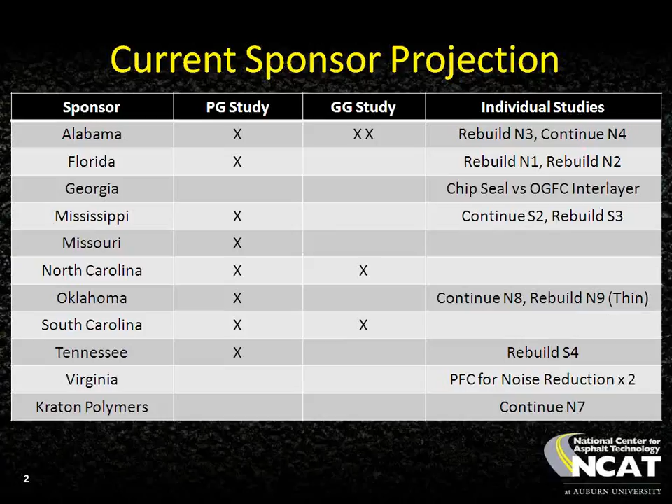And that letter of direction is important to us because we're going to start milling week after next, removing old test sections, removing sections that we placed in 2009. We're not going to engage in any activities related to the installation of new test sections, but we need to get the milling out of the way so that we can stay kind of in phase with our reconstruction contracts. We do have

both the plant production and the mixed placement contracts working through the process now at Auburn. The contract documents have been released to potential bidders, and we are waiting to fill in the gaps on some of the test sections at a mandatory pre-bid meeting that's going to be held here in a couple of weeks. So, again, that's kind of a reason for the timeliness of this discussion with you guys, is we want to make sure that things are headed in the direction that we expect them to head, and we got plenty of time. Now is the time to make course corrections, because we got plenty of time to do that.

So essentially, for our reconstruction timeline, we'll be milling week after next, and then probably the week of the 23rd, we would like to begin doing some work related to reconstruction. Lindy, if we could get a letter of direction by that time.

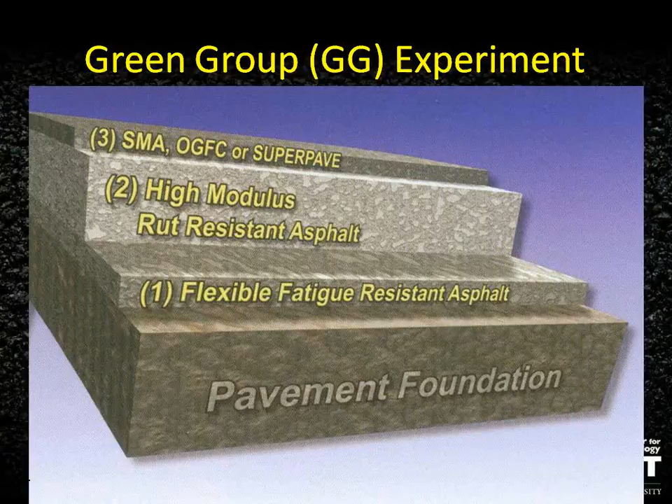So the basic recommendations we're making for this are, number one, we want to try to maintain that connection to the previous study so that we can make sense of it all through multiple research cycles. What that means is we would recommend that the subgrade and the base, and the basic principles of the mix designs from previous cycles, be our starting point for the mixes and variants we include in this group experiment.

The big difference here is the control mix we're going to use for this green group experiment, or that we would recommend, is kind of a quote modernized version of our previous control mixes, so that it's not 100% virgin materials. It's more the standard type of mix that you guys would be using on all your construction projects.

Can you be a little bit more specific about that, quote, modernization? Yes, ma'am, and I'll show you here in just a second.

Another thing we need to hammer out is our sources for the RAP, the RAS, and the tires that we're going to recycle. I had hoped that ADEM would be on the line so we could discuss the source of the tires with those guys. But what they essentially want us to do is kind of stand in the gap between industry and department, and make a recommendation that industry can embrace and the department can enable in their specifications, so we can end up with marketable improvements for them in the use of recycled tire rubber. Now, one of the things we don't know yet is who our contractor is going to be.

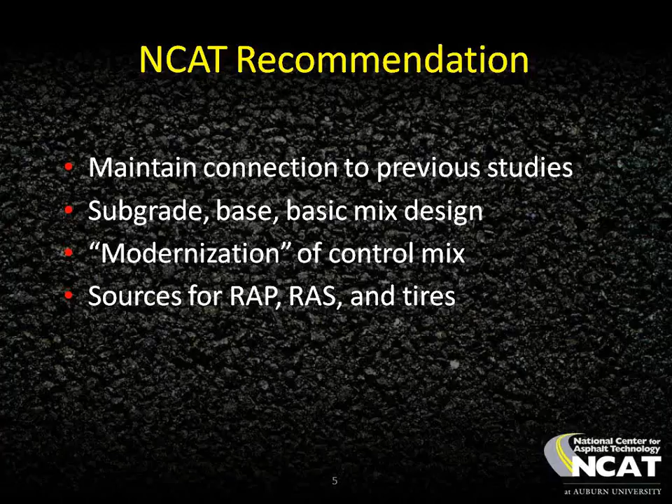We'll know more about who our contractor is in just a couple of weeks. I'm just trying to give you things to think about at this point in time.

Now, I think the general structure we're talking about doing, and this is obviously open for debate, this is the recommendation I'm making based on discussions I've had with Dave and Randy about this section. What we're talking about is a 1 1/4 inch surface on top of 2 3/4 inches of binder mix on top of 2 inches of base mix, giving us a total structure thickness of 6 inches. We've talked about maybe going thinner, but the high polymer mix is 5 3/4 inches, and it's done well because it has a super high fatigue resistance.

We've had 5-inch sections in the past that have failed after just a couple million ESALs, and 7 inches now has survived 10 million ESALs. So we think 6 inches would put us in a position in the middle that would either ensure we have failures within the traffic cycle, or if we're successful in extending life, maybe show significant differences between sections if we're really good at putting these things together.

Now, Randy, the reason I'm showing 2 inches in the base layer is that 2 inches was one of the standard thicknesses we used in 2003, but not in 2009. And the reason I'm showing 2 inches in the base, and beefed up the binder, is because we talked about using higher percentages of recycled materials in that middle layer. So the extra thickness we'd need beyond the surface mix, I threw it into the middle layer to drive the cost down as much as possible.

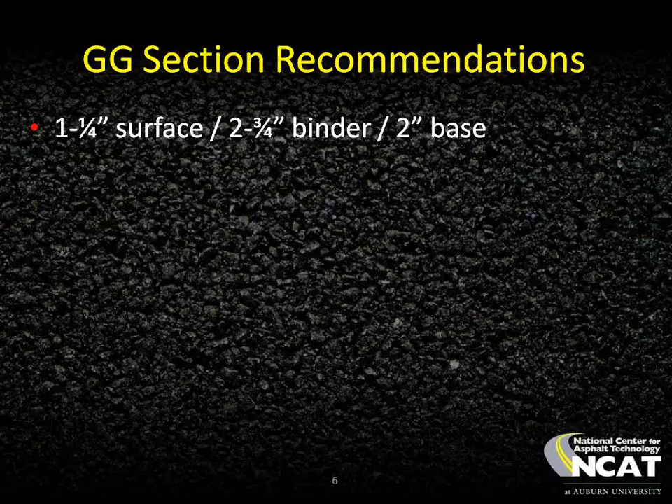So, what size stone are you going to be using in the base? Going to have 3/4 inch? I'm sorry, what was that, Milt? What size stone do you plan to use in your base, nominal maximum size? Well, that's up for debate. In the past we've used 19 millimeter mixes for base layers and binder layers, but that's this experiment belongs to y'all. It's wide open, and we can do it the way you think we need to do it.

Now, what we are proposing as a control section, Lindy, this addresses the question you asked earlier, is showing this as a surface/binder/base, kind of as a starting point to open discussion. What we've bounced around is having our control section be a 20% RAP dense surface over a 30% RAP dense binder over a 30% RAP base, and we're proposing that 20-30-30 control setup in this experiment because that's kind of in the ballpark for some of the RAP percentages states are running today.

But like Milt and Lindy both, we really would like to get your feedback on this proposal for a control section for this experiment.

Yeah, we normally don't place base at 2 inches. It's usually 2.5, 3 inches, or even 4 inches, especially that size stone, because some contractors complain about dragging with that 19 millimeter material. We can thicken that up because we can split the difference between the base layer and the binder layer. I stuck 2 inches in there so we could take advantage of the cost savings with a thicker binder layer, and because in the 03 experiment we had a lot of success paving 2-inch layers in that study. Everything we did was either a 2-inch or a 1-inch layer, and we didn't have any problems with it.

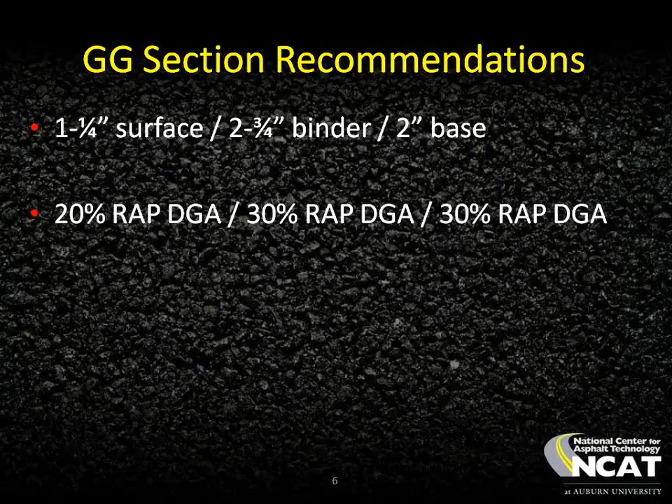I'm going to get this out of presentation mode and make changes as we go. That's a good idea. Well, it was Randy's suggestion. It was a Dave's suggestion, so I can't take credit for that. Yeah, that's a good idea.

Regarding the thickness, Buzz mentioned before that we're trying to achieve a couple things in selecting this thickness. We do want to see differentiation in performance within the cycle, and we thought we would get that with 7 inches, and we didn't. So that's one reason we want to go thinner.

I like going thinner, but what I would do is rob that binder layer some and take it back to 2.5 inches, and maybe make the base equal at 2.5 inches. How about this: 2.5 and 2 and 1/4? If I can put 2.5 in there, that's going to put us at 6 and 1/4 inches total thickness. Is that what we want to be? Well, 2.5 and 2 and 1/4 would be fine too. Yeah, I guess I'm okay with that.

There's one other option that I'd rather see. Maybe 2 inches of binder, maybe go thicker on the base, but you want to keep the binder at 2.5. Well, I can set it up however you want. No, I would rather have 2.5 on the base and 2 1/4 on the binder. Yeah, that's what I was thinking.

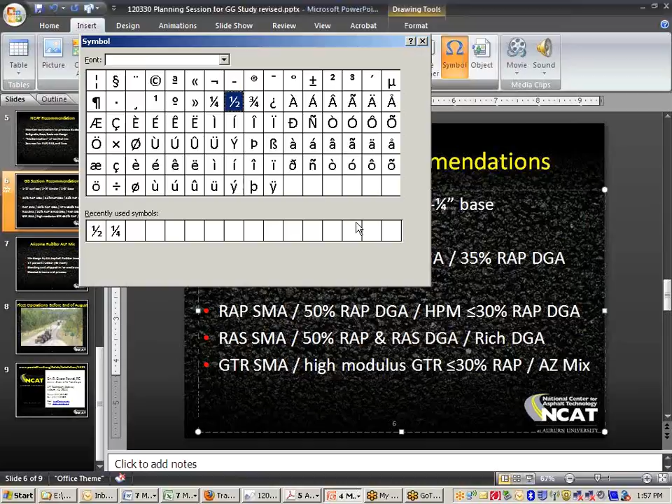What's the nominal maximum on the binder? I would guess 19 millimeter on both of them, but that's for y'all to tell us what you'd rather. That's what I would do. Yeah, that's fine.

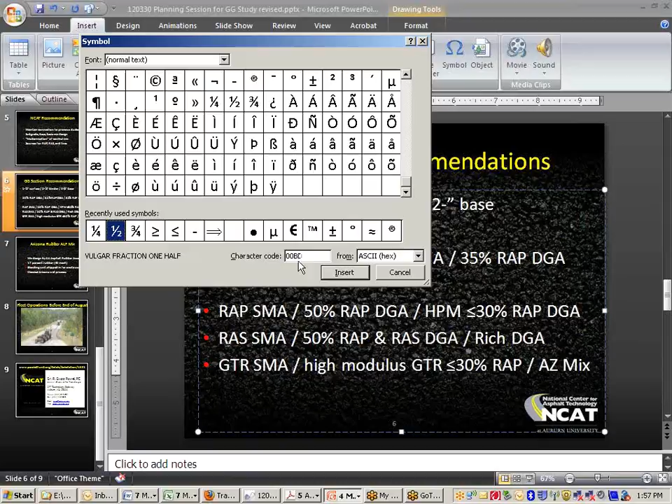We are going to try, in some of these experimental sections, to look at economics. So if it makes sense to try to do a 1 inch nominal maximum aggregate size and still get the strain tolerance, if we think it's more economical, we may want to throw that back out there. Well, I'm thinking about constructability. A lot of our contractors that complain about ride, they need a good intermediate layer to get a good ride. I guess that's what I'm coming from. Okay.

Everybody's okay with 1 1/4 inch surface, and that's a 9.5 nominal. Yeah. And we're okay with 20% RAP there. Yeah, that's good. Well, that's your 35% RAP in the binder. That's correct. Okay, base and binder.

Is that okay in both layers? I think, Randy, correct me if I'm wrong, but our thinking there was maybe a different design level air voids in the base to improve fatigue resistance based on laboratory testing. Not in the control, because I don't think that's current practice. I'd rather that layer fairly represent kind of the current practice. So 10-4, most agencies aren't doing anything different for that bottom layer in terms of air voids or gyrations. Correct me if I'm wrong, Milt or Lindy. Right, it's treated the same as all the others.

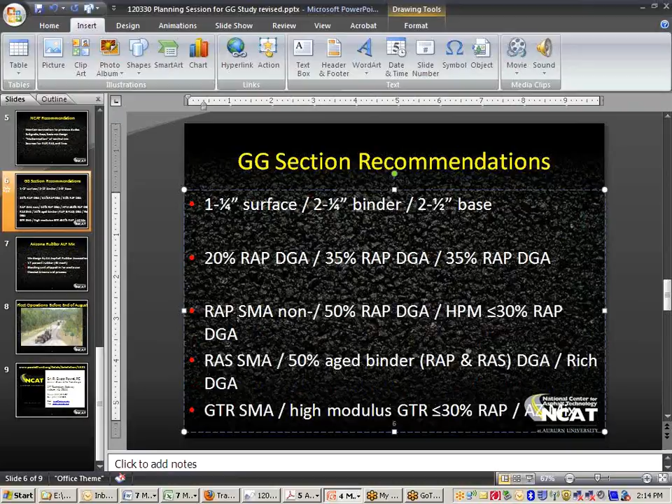We can go either way. I don't want to force anybody into anything they don't want to do. Let's go ahead and put, we use it all the time. We know we have good performance out of polymers, but this gives us a chance to see how it does without.

Do 25. No, I'm not comfortable with 35. Oh yeah, not that high. 25. Okay, well for both mixes, pushing the envelope right there. And then 5% shingles. Yes, because I don't think from Richard's research so far that we need to go higher on that.

Okay, that'd be 5%. No RAP. What was that, Milt? 5%. Oh, you said on that second one, you got your cursor on. It's 5% RAS. That has no RAP in it too. That's right, that's good, that's fine. And that's what we're saying, right guys, that we're not going to put any RAP in that one?

Or do we? I'd rather keep them somewhat simple in terms of the clean. Well, and keep in mind with these that, of course, we're looking at kind of structural composite performance, but like the texture measurements that we'll make on these on a weekly basis, that's going to tell us a lot about surface mix quality. So it'll be kind of neat to have a 25% RAP and a 5% RAS SMA to compare to each other.

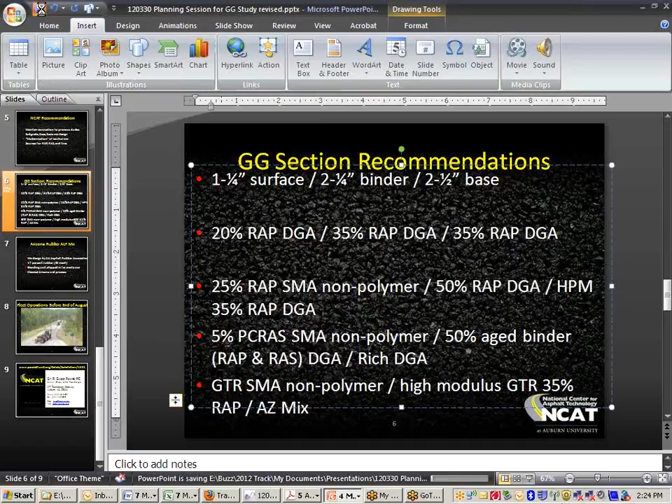Got to start getting our materials together and see what we can put together. And really the last slide that I had, Milt, was just information about the Arizona rubber mix. Okay, so you've seen that before.

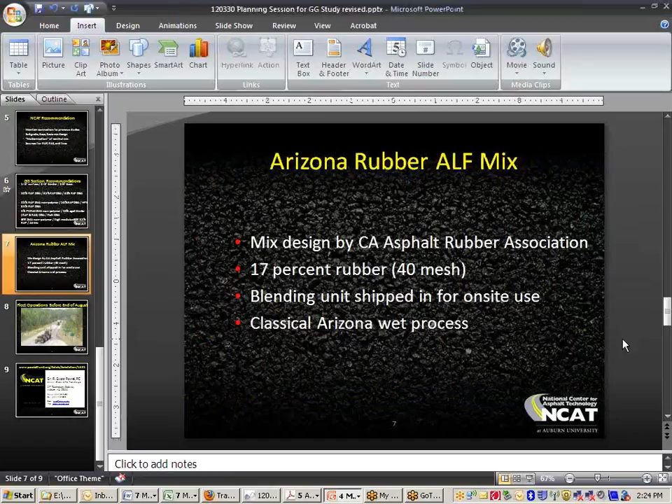I think Randy's got a meeting that needs to start at 2:30. But our goal is to get all this work done and get the fleet going before the end of August, as we did last research cycle. Yeah, and I think the pieces of the puzzle are falling into place now, so hopefully we'll be able to do that.

Anybody got any other questions or comments or concerns?

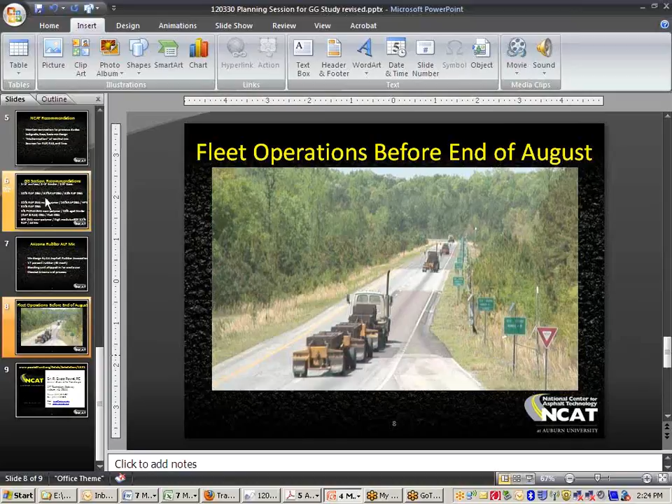Looks good to us. Could you send us that PowerPoint, or post it somewhere so we can refer to it? Because I didn't take notes. Marilyn did. Well, absolutely. I didn't take notes either, I just sit here looking at the screen. I took notes, but you can't read them, so it doesn't matter.

I'll send you the PowerPoint, and I'll also post the recording out there so you can go back and refer to it at a later time if you want to. I think what you have is a good foundation to work off of. I guess you guys do your lab work and see how it turns out.